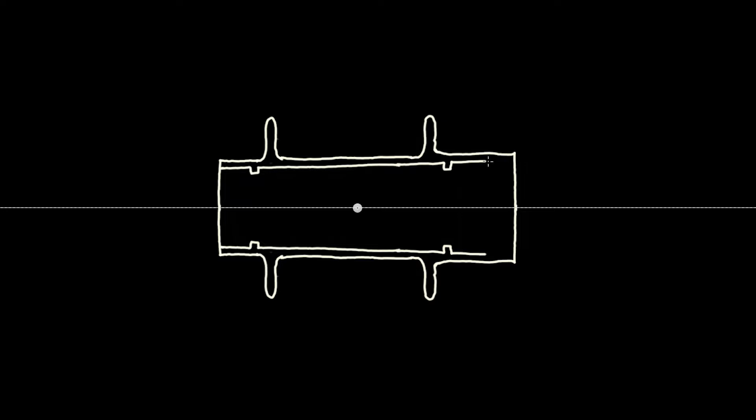Now the anatomy of a typical rear wheel is as follows. The hub is essentially a hollow cylinder with internal flanges to prevent the wheel bearings from being pressed in too far. Between the bearings is typically an alloy sleeve, but not all wheels have this.

For the rear wheel, the Freehub body rotates independently of the hub and is what the cassette actually attaches to. It only rotates in one direction by way of typically 6 or sometimes more pawls, which are basically little spring-loaded flaps that only allow the Freehub to spin in one direction.

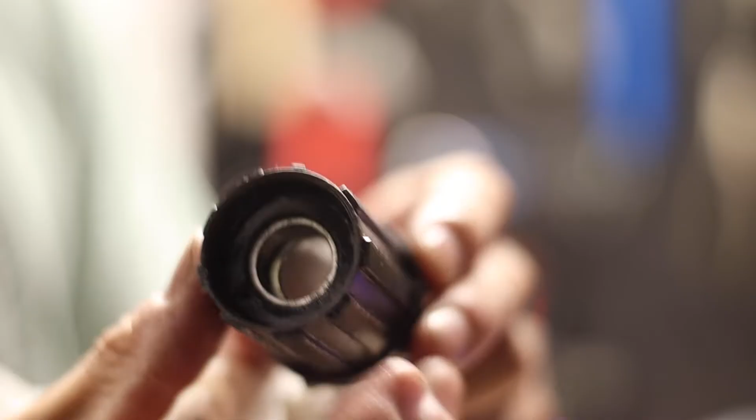This is the mechanism that allows you to coast without pedaling and propels you forward when you start turning the cranks. Inside the Freehub body itself are two additional bearings that support the load, again with an inner sleeve between the two. Often there's a small spacer between the hub bearing and the Freehub body, so make sure to keep tabs on that if one exists.

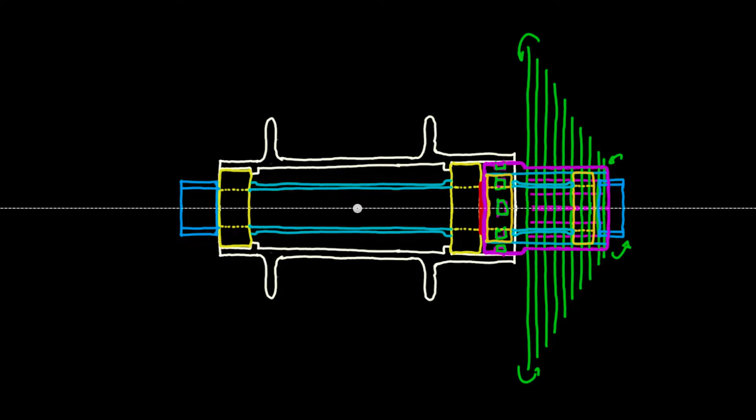Now the end caps are usually just a friction fit into the ends of the hub and are the final piece to the puzzle, and they're what actually make contact with the frame or the fork's dropouts. Holding it all together is the axle, which secures the whole assembly to the frame.

So with the wheel off, typically the Freehub will simply just pull off, and you can actually see the pawls and the ratcheting mechanism up close.

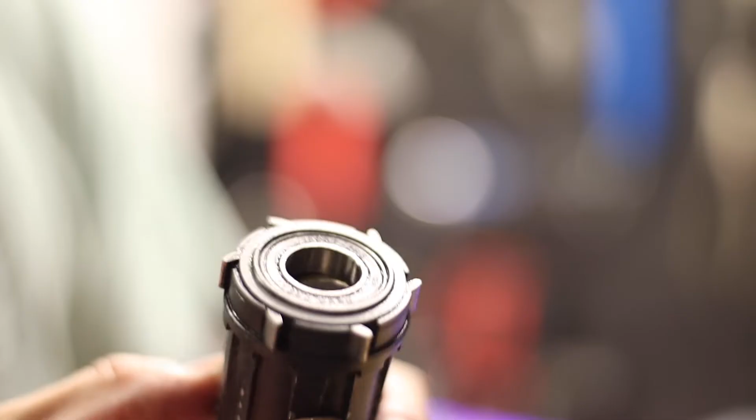The pawls themselves should be easy to press down, and they should spring back easily as well. Inspect the inner ratcheting surface on the hub for any damage as well.

The bearings will also be apparent, and we'll need to remove these ones that have gotten really rough over the past 1,000 miles or so of riding.

Just like with the wheel bearings, you'll need to slide the inner sleeve off to one side, usually just by pushing it with your fingers, but if it's tight, you can use a thin but coated surface so you don't gouge the soft alloy sleeve.

There will also likely be an outer dust seal which you can pry off by carefully using a utility knife.

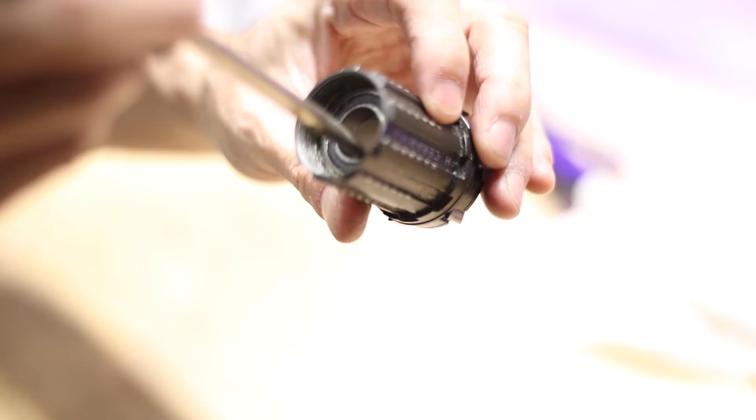Now with the inner sleeve offset, you can insert a sacrificial flat blade screwdriver and set it up against the inner race of the opposite side bearing. Tap it out gently with the hammer, going around the perimeter symmetrically to try and tap the bearing out as straight as possible to avoid damage to the inner hub surface.

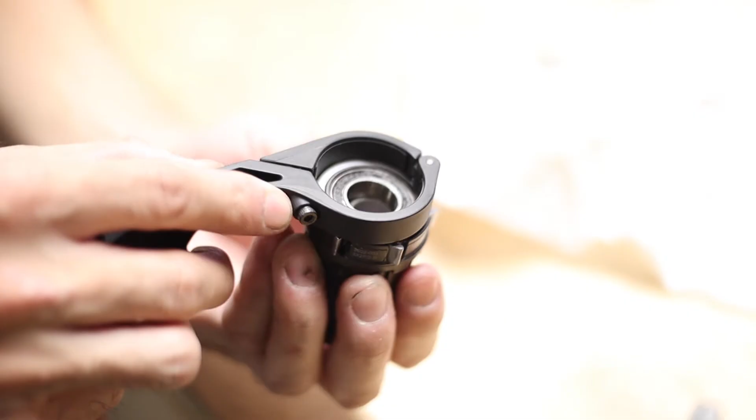With one bearing out, you can remove the inner sleeve and flip the Freehub over to tap out the other side. Now on one of the sides of the Freehub body, you might need some type of spacer to allow the bearing to slide out unobstructed. In this particular case, the bracket from my Garmin out front mount just happens to work perfectly.

With both bearings out, you can now give the empty Freehub body a good clean. I might do another video on how to properly size a bearing for any particular application, but in short, you need 3 critical dimensions.

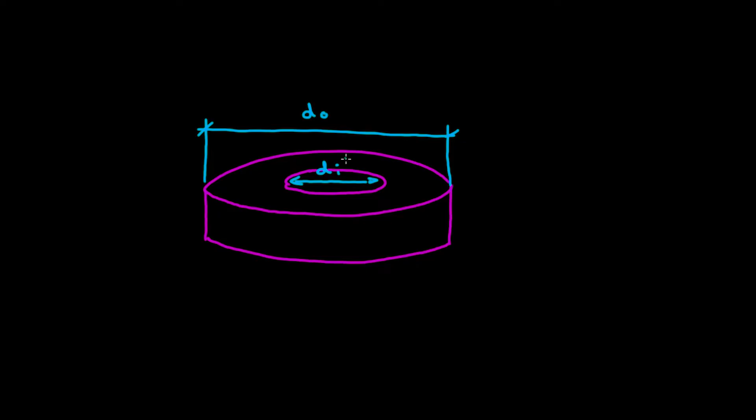You need the outer diameter of the bearing, the inner diameter of the bearing, and the height of the cartridge itself.

Thankfully, replacement cartridge bearings are generally pretty cheap unless you decide to go fully ceramic, so it's a worthwhile skill to have to be able to size and replace your own wheel bearings, both in the hub as well as in the freehub body.

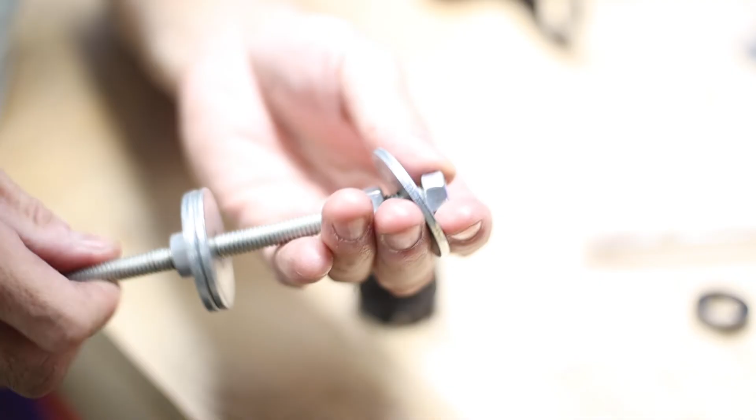When you're ready to install fresh bearings, a simple bearing press costs less than $5 and is made from a length of threaded rod, a few washers, and nuts. The main criteria are that the rod diameter must fit within the inner diameter of the bearing, the washer's outer diameter should fit over the outer race of the bearing to be pressed, and the nut can't fit through the inner hole of the washer.

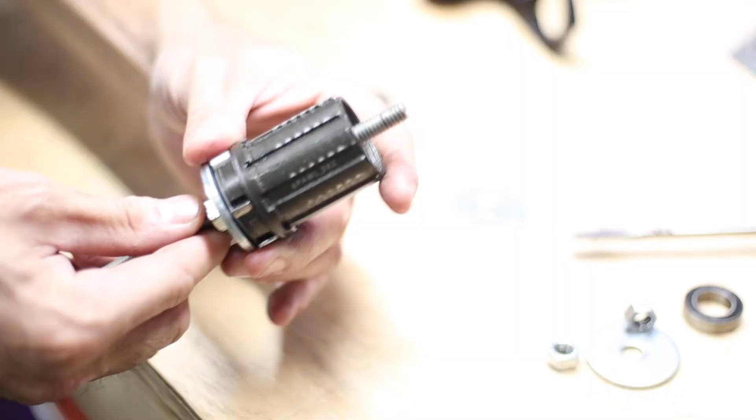For me, it helps to mount the bottom nut of the press in a bench vise for stability. Set the washer down first and then slide on the freehub body. We'll press in one bearing at a time.

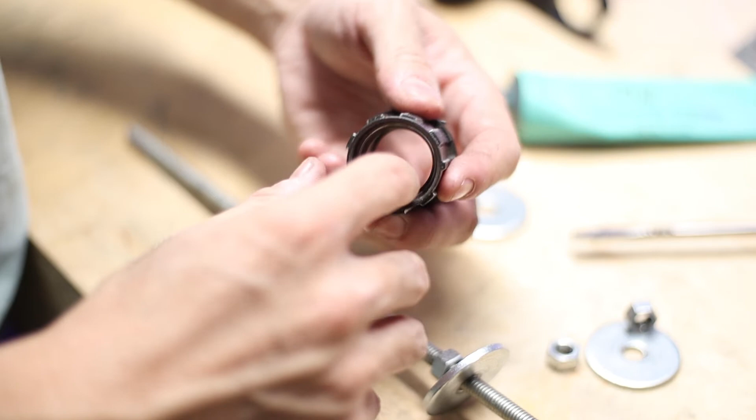Grease the inner surface of a fully cleaned freehub body, and then you can even spread a thin layer on the bearing outer race. You can slide the new bearing over the threaded rod, and if you're doing the outer side first, you'll need some additional spacers to clear the top lip of the freehub body. The old bearings that you just punched out work perfectly for this.

Follow the stack up with another washer and the top nut and snug everything up, but don't start cranking down just yet. You want to try and make sure everything is lined up as straight as possible first, and then turn the nut slowly and incrementally, periodically checking to see if the bearing is being pressed in straight.

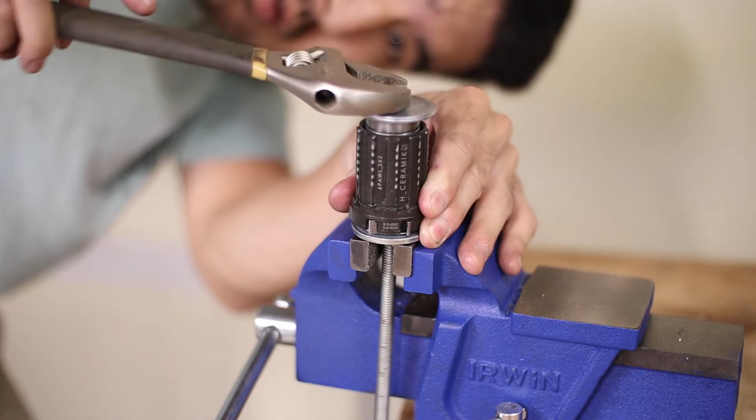If it is, you can continue to press the bearing until you meet a sudden stop, which means you'll have pressed the bearing in all the way to the inner flange. At this point, the bearing is fully pressed in and there's no need for any additional force.

Flip the freehub body over and reinstall a cleaned and greased inner sleeve, followed by a brand new cartridge bearing, again lightly greased on the outer race.

Following the same process as the opposing side, carefully and incrementally press the bearing in, checking the straightness frequently. It's possible that you may need another quarter turn or so using a spacer to make sure everything sits flush and to ensure that the bearing is fully seated.

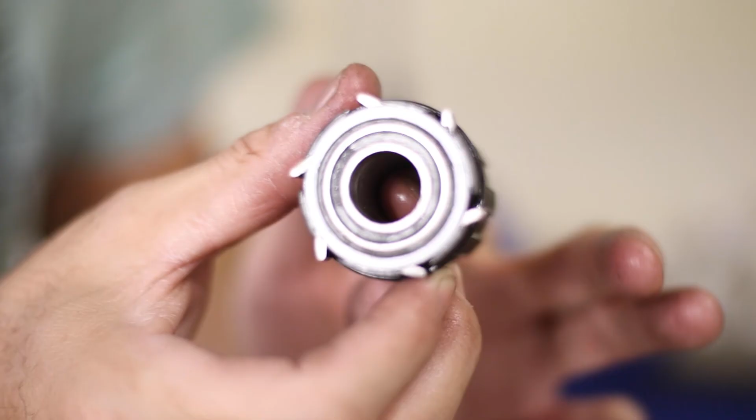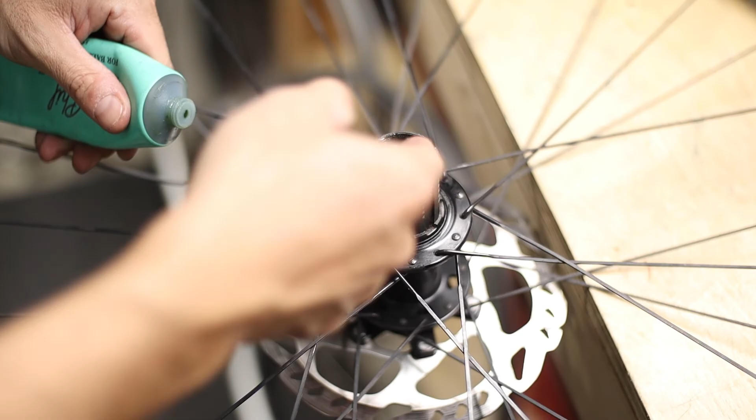At this point, your new bearings are installed and it's just a matter of putting it all back together. If your freehub sound is too loud for you, this is actually a good opportunity to put a little bit of grease on the ratcheting surface of the freehub.

Reinstall the cassette on a well-greased freehub body and tighten the lock ring down to 40 Newton meters. Reinstall the end caps and you can now reinstall the wheel back on the bike. At this point you're actually all set and you can enjoy the buttery smoothness of fresh cartridge bearings.